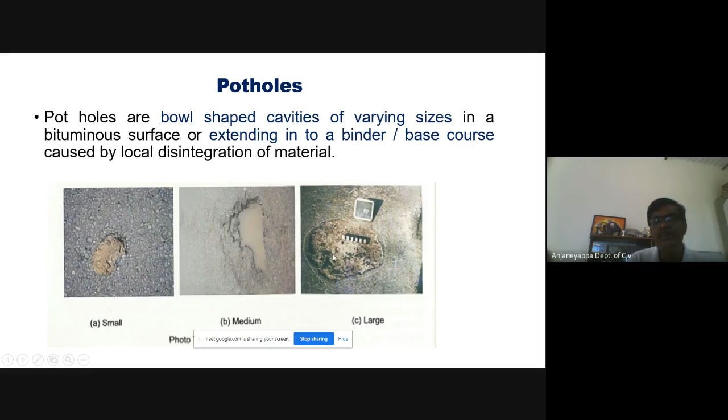What are the causes for these potholes? The most common cause for pothole formation is loss of adhesion in the bituminous surface course due to ingress of water into the pavement or due to higher voids in the surface. The bituminous pavement gets softened as a result of loss of cohesion under the action of traffic.

If not attended to in time, the aggregates in the surface get progressively loosened, which results in a pothole. Lack of proper bond between the bituminous surface and the underlying water bound macadam or wet mix macadam base layer can also cause formation of a pothole.

A thin bituminous surface which is unable to withstand heavy traffic, and improper or inadequate camber, can also cause potholes. In dense mixes like bituminous concrete, potholes can be caused by too much or too little fines, that is the material passing the 75 micron or sand size particles.

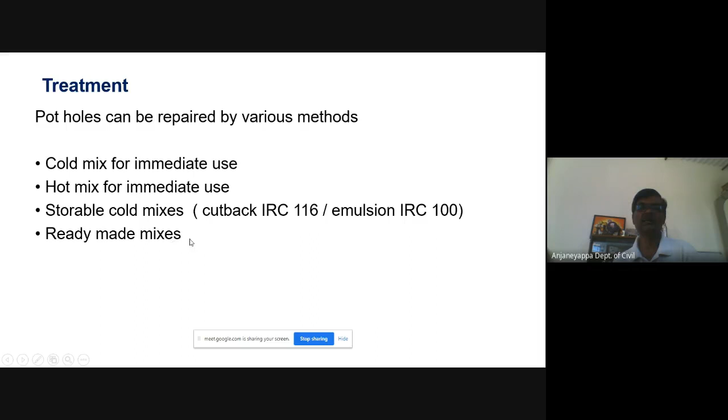We can also use ready-made mixes. Many companies prepare pothole patching mixes that come in bags. So we can bring those bags consisting of ready-made pothole patching mixes and use them. All these methods can be used for patching a pothole.

So here we can see a video of the pothole patching method operation. I have two videos, very old videos, but they are still relevant.

These videos are by the International Road Federation. You can see it was prepared in 1985 by the International Road Federation.

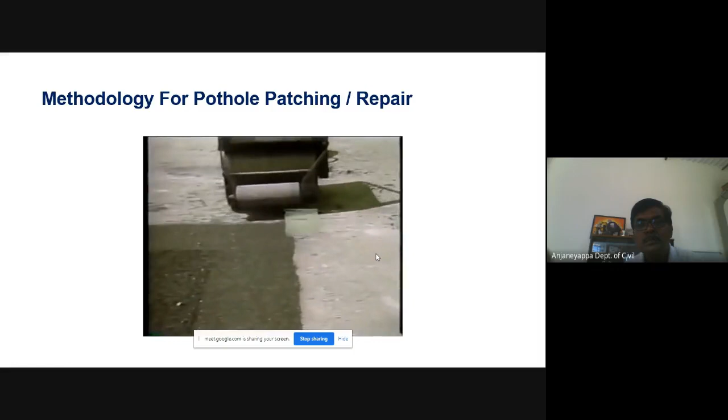Potholes are a major inconvenience, a safety hazard, and are damaging to vehicles. This program covers procedures for repair of potholes in asphalt concrete pavement. It focuses on the materials and equipment used in pothole repair and the procedures for making a permanent repair. Potholes must be repaired quickly because they are a hazard. They can cause serious accidents, and they slow down the flow of traffic.

It's important to follow the correct procedures for repairing potholes. You'll save money, and you'll ensure that the repair will last longer.

Potholes are caused when traffic breaks up a weak spot in the pavement. Several factors can contribute to weak spots, among them overweight vehicles, construction flaws, or water. Another major cause is repairs not done right the first time. A poor repair job like this won't last more than a few days.

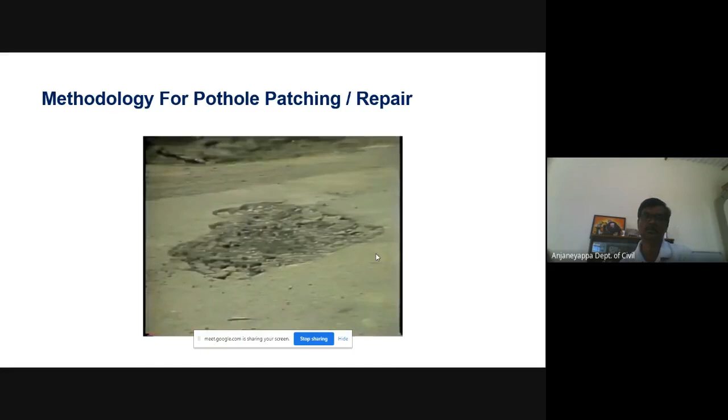On the job, you'll see many sizes and shapes of potholes. Some will be shallow, some deep, and some will be irregular. The repair procedures are basically the same, no matter what the size or shape.

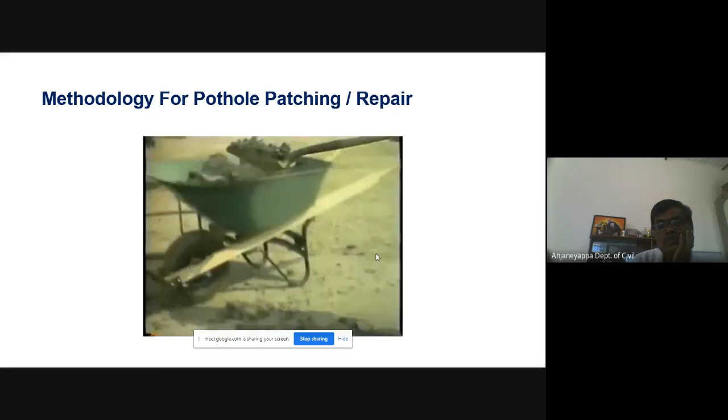Pothole repair involves 9 steps: placing traffic control devices, marking the defective area to be repaired, cutting out the defective material, cleaning out the hole, applying the tack material.

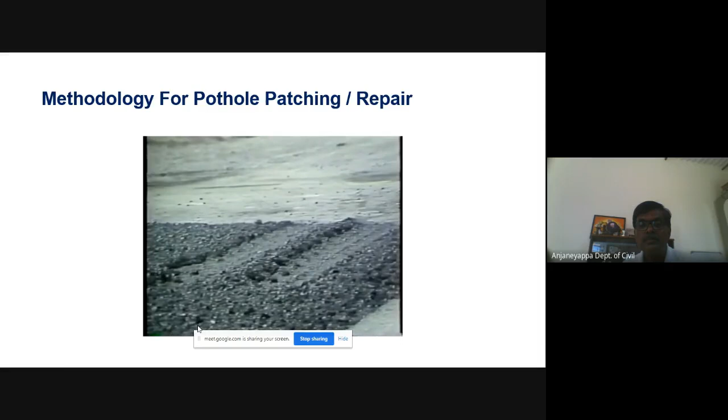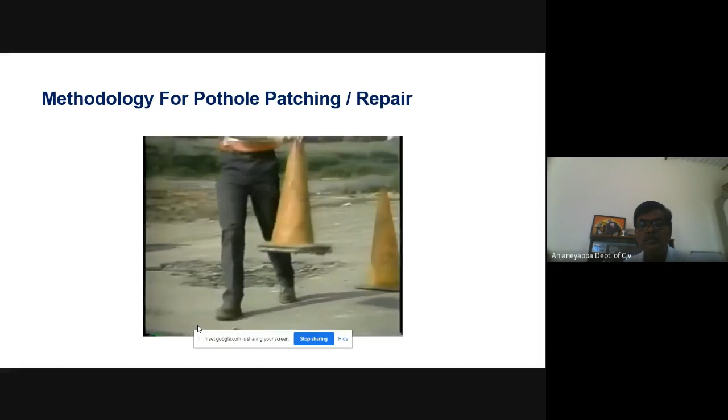Pothole repair involves 9 steps: placing traffic control devices, marking the defective area to be repaired, cutting out the defective material, cleaning out the hole, applying the tack material, placing the mix, compacting the mix, cleaning up the job site, and preparing to move to the next job site.

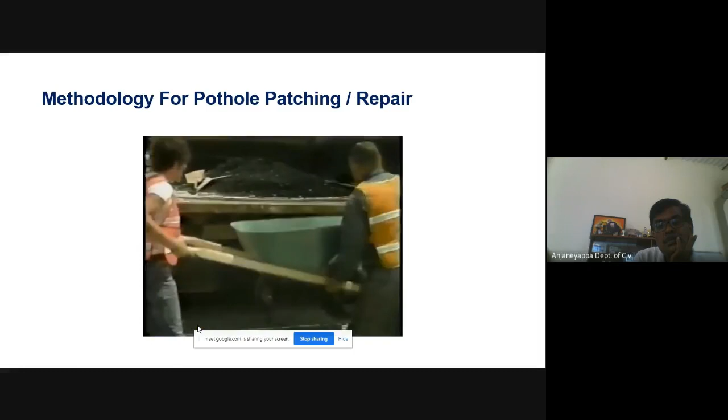Let's look at each work step in detail. The first step covers placing traffic control devices, who are responsible for the safety of the crew and motorists.

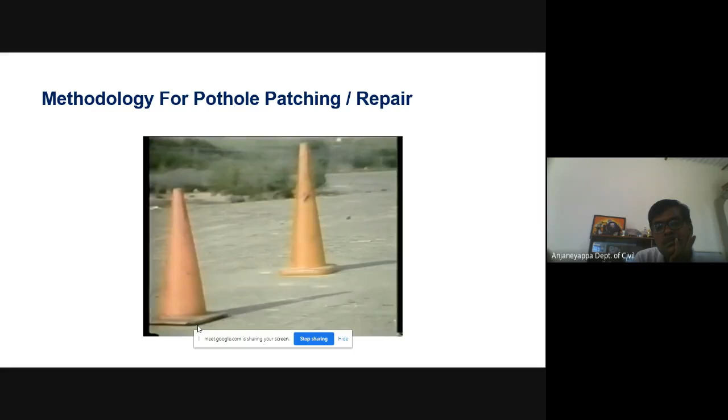Observe the work area and decide where to place control devices. Place signs, cones, and barricades so they can be seen by drivers in time for them to react. If required, position flagmen at appropriate sites. Follow your traffic control standards and procedures.

The second step is to mark the defective area. First, sweep away loose material from the pothole. Examine the area carefully to see the extent of the weakened pavement.

Then mark the area to be removed. Use chalk, crayon, or paint to mark the edges. Generally, you can use the width of an outstretched hand as a guide to be sure that you mark the area in good pavement. Anything more may result in the unnecessary removal of good pavement.

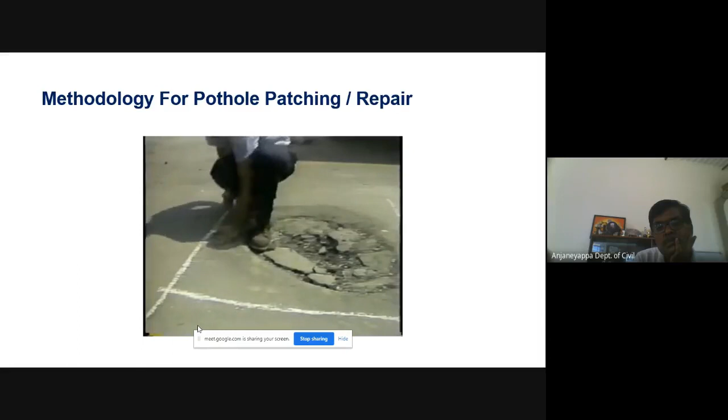Mark the repair area in a rectangular shape with straight sides and square corners. This is a step you should perform so your workers have clear instructions. Remember, you may have to enlarge the area once the cutting begins and you get a better look at subsurface conditions. Repair areas don't necessarily have to be square, but never use a round shape. Adapt the outline to the shape of the pothole.

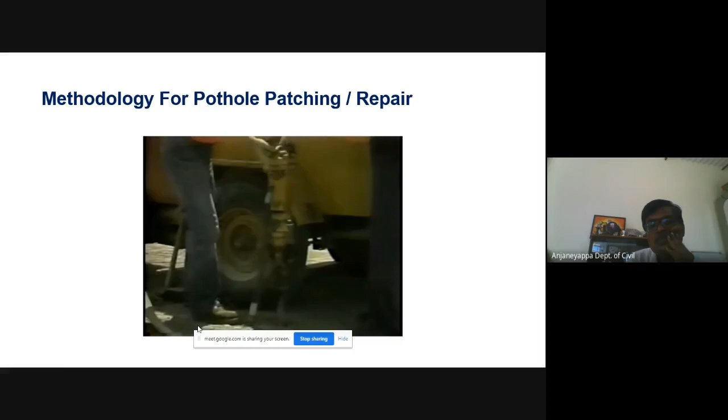The third step involves cutting out the defective material. To do the cutting, you'll be using either a jackhammer with a spade bit or a pickaxe. The cutting action should always begin in the center and proceed toward the edges. This has 2 advantages: there is less resistance to cutting, and you'll not weaken the good pavement outside of the marked edge. Also avoid rocking the spade bit, because this will damage the good pavement.

Vertical sides are essential for proper compaction of the patch. Always check the sides with something square to make sure that they are vertical. This, along with compaction, is one of the 2 most important steps for a permanent repair. Be sure to cut down to stable material. It will form a good foundation for the patch. Also make sure that the bottom is level.

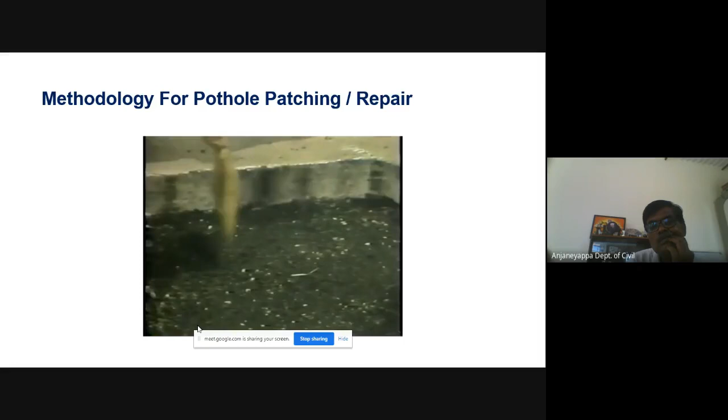The fourth step is the removal of defective material. A patch adheres best to a clean surface. Using shovels, remove all loose materials and debris from the hole. Next, blow out the fine materials using an air compressor, or sweep it out using a stiff bristled broom.

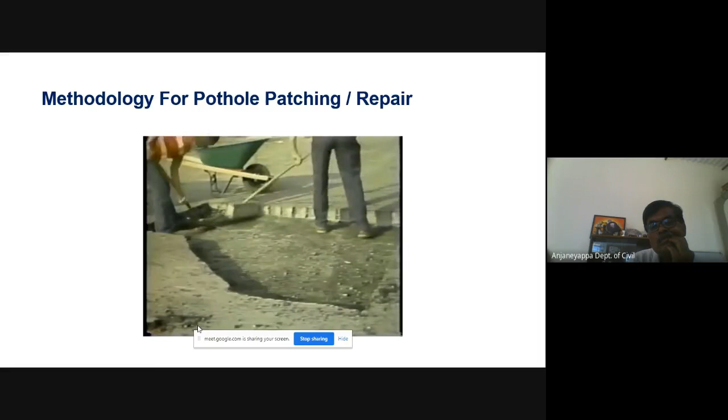Dispose of debris properly. Do not leave materials in the roadway, on the shoulder, or in a drainage ditch. Material left in the ditch will cause the water to pond and may result in another pothole. Next, make a thorough inspection to see that no weakened material remains on the sides or bottom of the hole or in the corners. Once all loose material is removed, you're ready for tacking.

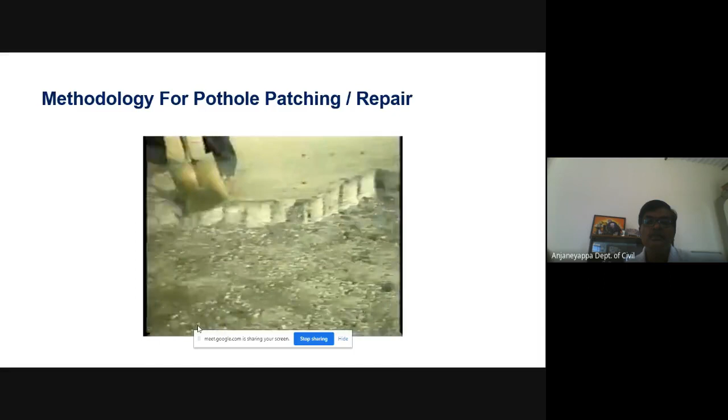Tacking the hole is step 5. Tack serves as a kind of glue to bond the patch in place. Apply tack to the sides of the hole first. Do not overlap onto the surrounding pavement. Use either a hand broom or a sprayer.

Remember, apply a thin film on the sides and the bottom of the hole, allowing the texture to show through. Pouring results in excess tack, which will soften the patch and cause it to break up.

The materials you'll use for tacking are either emulsions or cutbacks. Emulsion is preferred. It requires only a little curing before putting premix in the pothole. Also, you can apply it to damp surfaces. Cutback is less desirable as a tack since it must cure at least 15 minutes. Also, cutbacks may require additional heating for ease of handling. You can recognize cutback by its gasoline or kerosene smell.

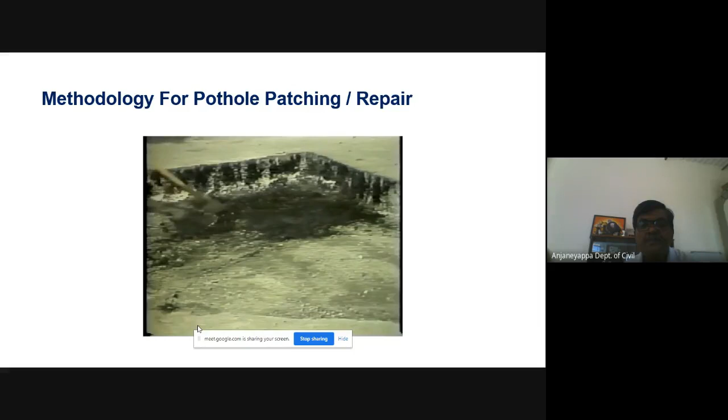In some cases, you'll have to cut out the damaged material down to the granular base. In this situation, apply a heavier coat of tack to the bottom of the hole. This is called priming. It acts as waterproofing. Properly cured tack is sticky to the touch. Remember, if you apply too much tack, the patching material will be weakened. But if you apply too little tack, the patch will not stick properly.

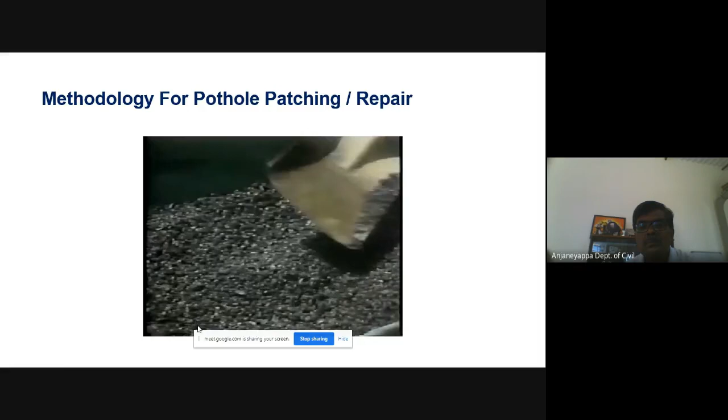Step 6 involves placing the premix material. Whether you're using hot mix or cold mix, make sure it's workable. Don't use it if it's hard to shovel or it's crusted. Begin placing the premix using a square pointed shovel. Begin in the corners and sides first. Then place material in the center.

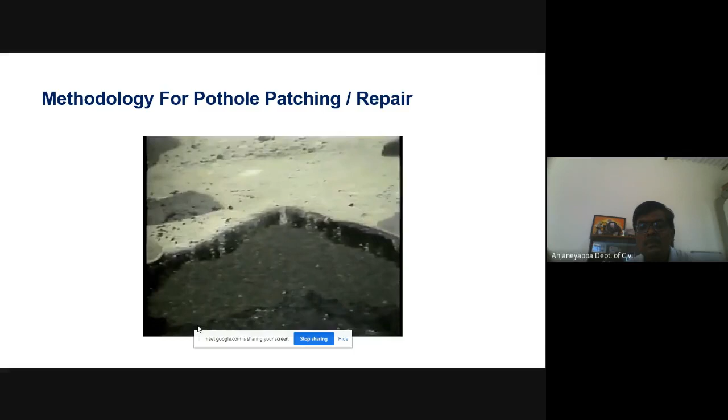If the hole is deep, it may require several layers of material. Generally, the maximum depth to use for each layer is 8 centimeters in uncompacted layers. This is equivalent to the width of a hand. After placing each layer, spread it level with a rake. Make sure you keep all patch material in the hole. Mix left on the pavement around the hole will make the next step harder.

Place additional layers only after compacting previous layers. Leave the uncompacted surface layer of the patch slightly higher than the surrounding pavement surface to allow for compaction.

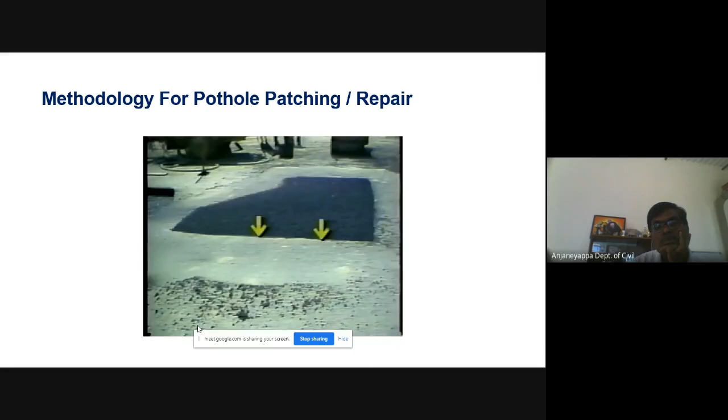Step 7 involves compacting the premix. Compaction, along with making the sides of the hole vertical, is one of the 2 most important steps. Good compaction makes the patch last a long time.

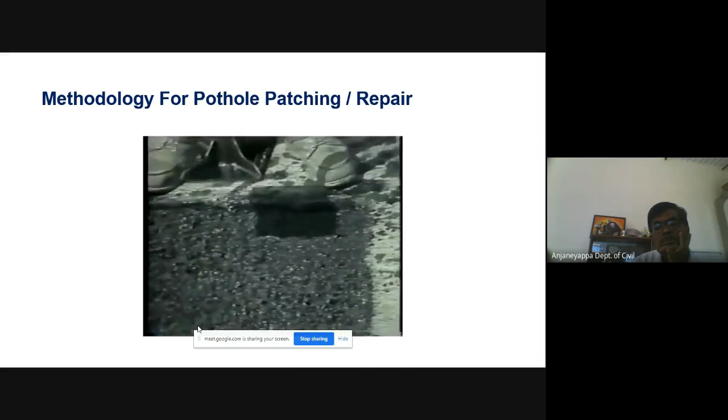To compact the patch, you can use several different types of equipment. The best type is the vibratory roller. It works better and faster. You can also use a vibratory plate, a tandem steel-wheeled roller, or a hand tamp. A hand tamp is not the best tool to use. If it's the only compaction tool available, tamp especially thoroughly and use thinner layers, about half the width of a hand.

If you use a roller, make sure the area around the patch is clear of debris prior to compaction. Debris under the roller will cause poor compaction.

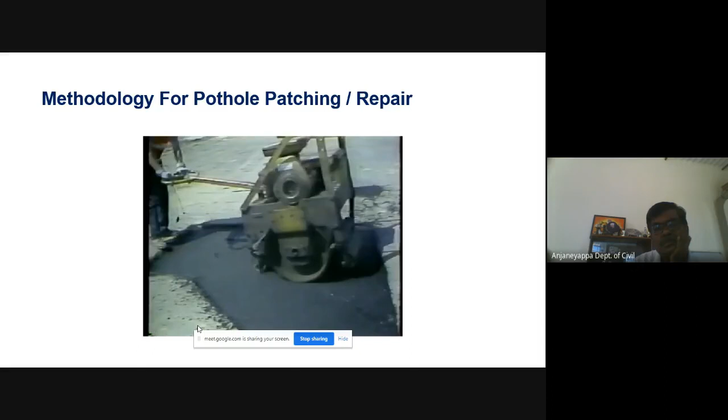Remember, if the hole is deep, it may require several layers. Compact each layer thoroughly prior to placing another layer. Whether you're placing 1 or 2 layers, the procedures are the same. Always start compacting in the corners and edges. Then work in toward the center of the patch.

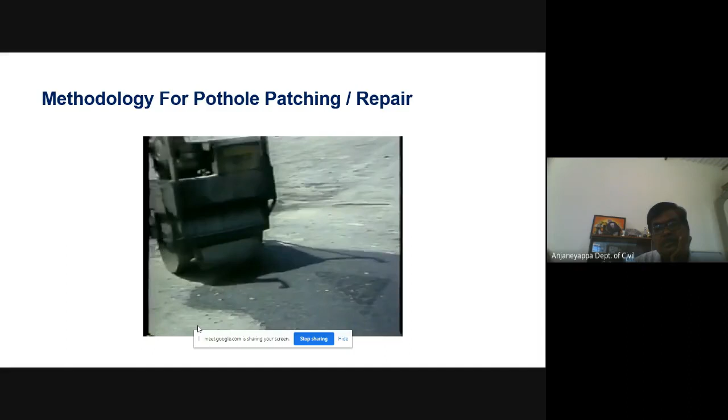First, make 1 or 2 passes without vibration. Otherwise, the machine will push uncompacted premix out of the patch. Then make a minimum of 10 to 15 passes with vibration. You can tell when the patch is thoroughly compacted because repeated applications of the compactor won't leave any impressions in the patch surface. Leave the final surface of the patch slightly rounded above the surrounding pavement.

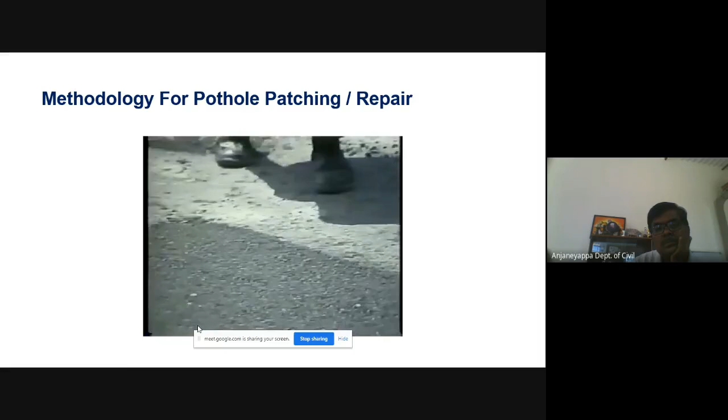Check the crowning with a straight edge in the direction of traffic and across the roadway. The center of the patch should be about the thickness of a pencil above the pavement. This helps drain any water away from the patch.

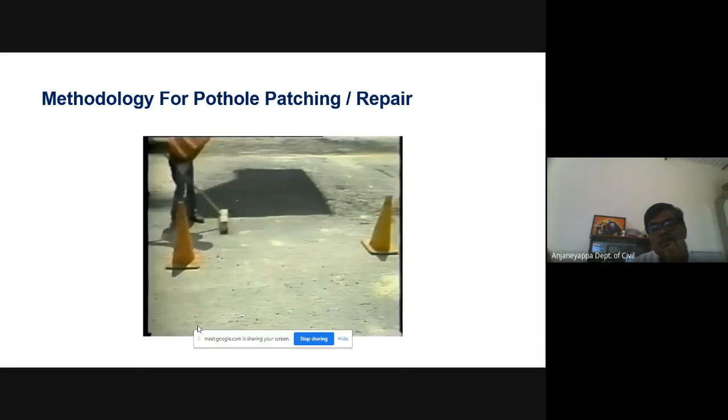Next is step 8. You should make sure the crew cleans up the job site. Dispose of excess material properly. Once again, don't throw debris onto the shoulder, in ditches, or near catch basins. It will cause drainage problems. Load it onto the truck or dump it in a designated area.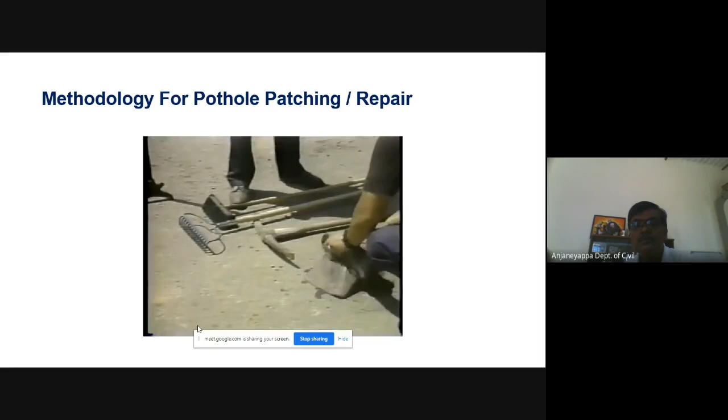There's still one last step before the repair is complete. Step 9, preparing for the move to the next job site. First, count all the hand tools and equipment, and make sure the tools and equipment are properly cleaned and nothing is broken.

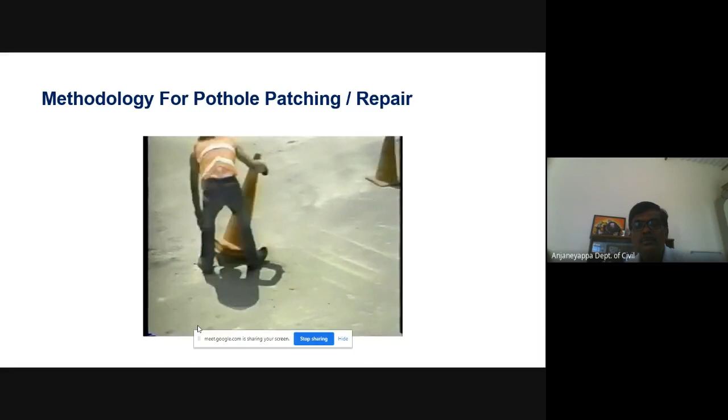As the equipment is being loaded, make a final inspection of the job site. Make sure that nothing is being left behind, and the work site is left in proper condition. Also, remove and load traffic control devices in the reverse order in which they were originally placed. Follow your standards for traffic control to make sure it is done correctly.

As the crew loads the devices, make a final security check to see that all equipment is secured before moving on to the next job site.

Before we finish, let's quickly review each of the 9 steps of pothole repair. The 9 steps include placing traffic control devices,

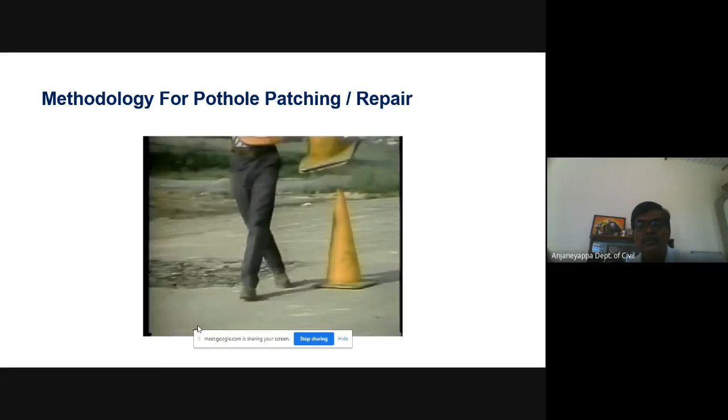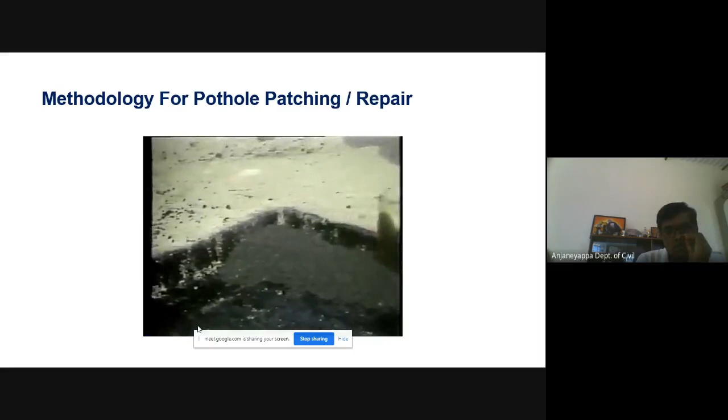marking the defective area to be repaired, cutting out the defective material, cleaning out the hole, applying the tack material, placing the mix, compacting the mix, cleaning up the job site, and preparing to move to the next job site.

Following the procedures presented in this program will result in professional, long-lasting repairs, which will benefit you, your crew, and the driving public.

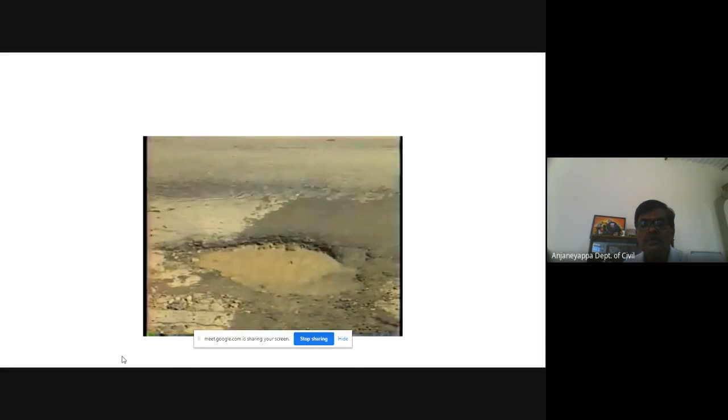Potholes are caused by weak spots in roads. These weak spots can be created by heavy vehicles, poor construction, or water.

This videotape will show you how to repair potholes in surface treatment pavement using granular material. If you're using asphalt mix, refer to the IRF videotape, Pothole Repair in Asphalt Concrete Pavement.

Regardless of their location, all potholes can be a threat to your safety and damage your vehicle. But most importantly, potholes can result in severe and costly road damage if they're not repaired quickly and correctly.

Surface treatment pavement is not as strong as asphalt concrete pavement. Therefore, these potholes must be repaired before they become so large that the road base is weakened. Extensive repairs would then be necessary.

A repair using the correct procedures will keep water from getting into the road base, resulting in a long-lasting patch.

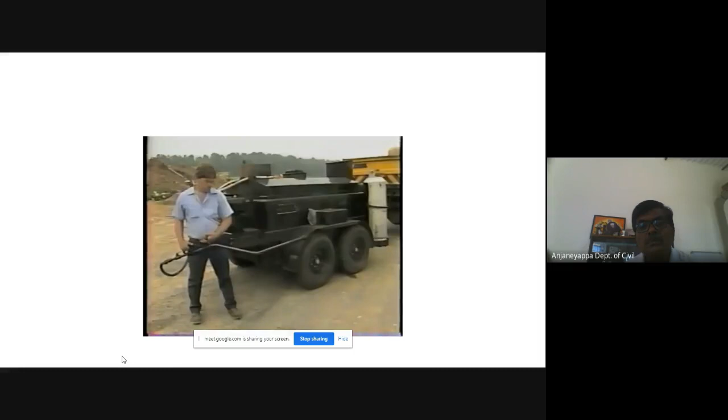Proper equipment will help you make the repair efficiently. You will need hand tools for removing damaged material from the pothole, placing the new material, and cleaning up the work site. An asphalt sprayer for applying the liquid asphalt, and a vibratory roller to make the materials firm.

You can also use a vibratory plate compactor or a tandem steel-wheeled roller. You will need a dump truck to carry your crew, equipment, and materials to the work site, and traffic control devices to keep vehicles moving safely.

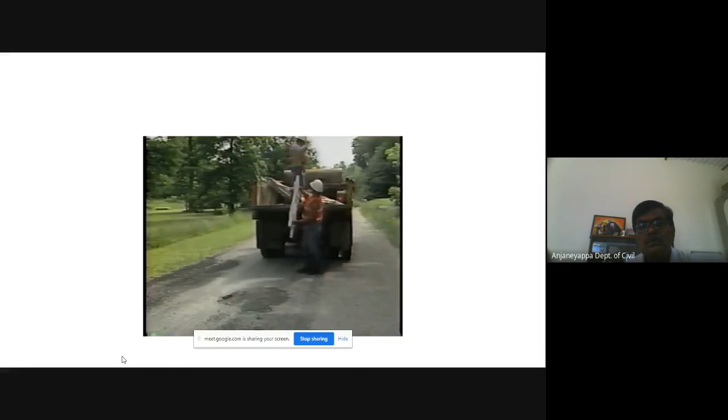The proper materials make the repair durable and long-lasting. You will need granular material to fill the hole. It must be graded and approved according to local specifications. This material should be the same type and quality as the existing base.

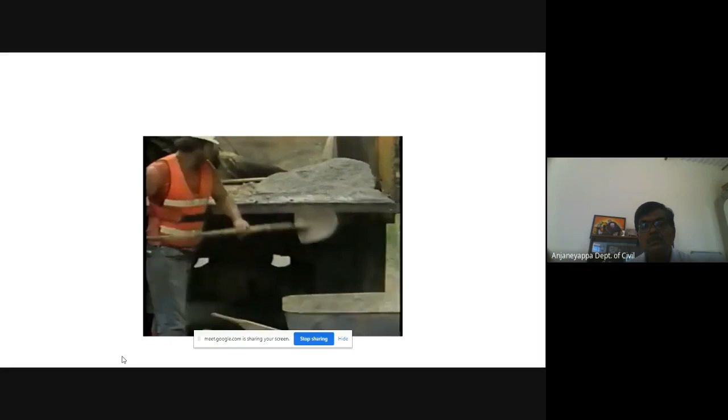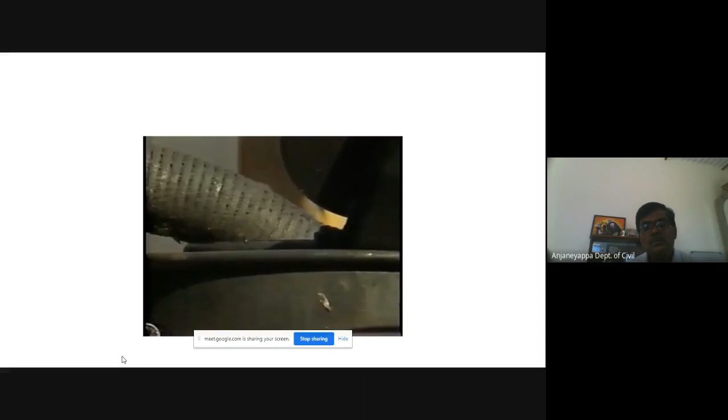You will also need cover aggregate that is clean, dry, and no bigger than your thumbnail. Liquid asphalt to seal the patch. The liquid asphalt may be rapid or medium curing asphalt cutback or asphalt emulsion. And water to make sure the granular material has the correct moisture.

All potholes in surface treatment roads are repaired in the same way. You will use the same procedure for all shapes and sizes of potholes. There are 8 steps. Step 1. Place the traffic control devices. Step 2. Mark the damaged area.

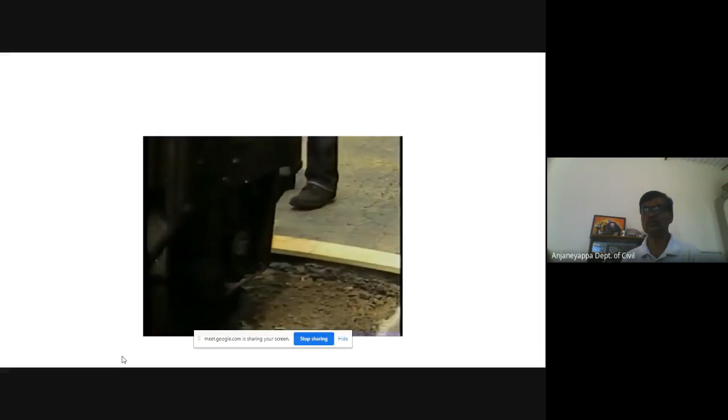Step 3. Cut out and remove all damaged material. Step 4. Fill the hole with granular material. Step 5. Compact the granular material. Step 6. Seal the surface with liquid asphalt and cover aggregate.

Step 7. Clean the work site. Step 8. Remove the traffic control devices. We will look at each step in detail.

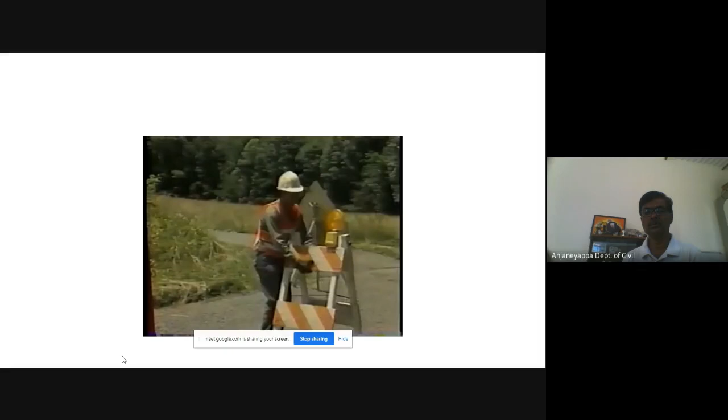Step 1. Place traffic control devices. These include barricades, cones, and signs. Proper placement of these devices is important to the safety of your crew and the vehicles. Place these devices so that the vehicle drivers have adequate time to respond. For further instruction, refer to the IRN videotape, Traffic Control During Maintenance.

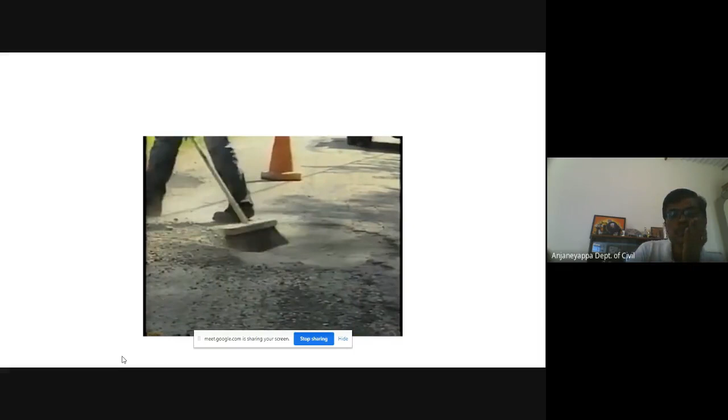Step 2. Mark the damaged area to be repaired. Before you mark this area, clean out the pothole so you can inspect it. Clearly mark the pavement outside the pothole.

To avoid waste, the line should be no further from the hole than the width of your hand. The line should also be straight and located in good pavement. The corners should be as square as the shape of the hole will allow.

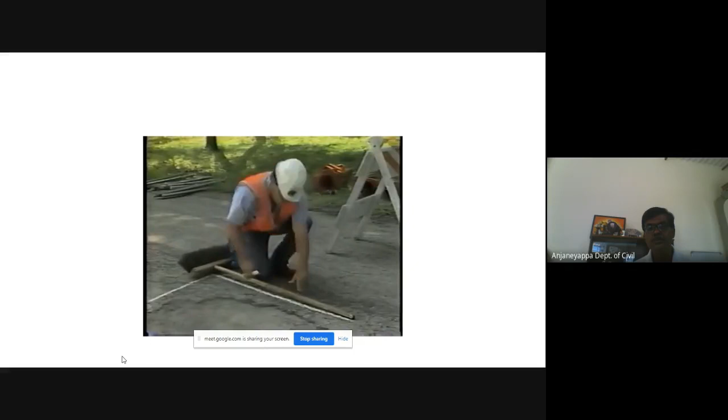Step 3. Cut out and remove the damaged material. Use a pickaxe and shovel. Start in the center and work toward the sides. Remove all material necessary to reach a firm, flat bottom.

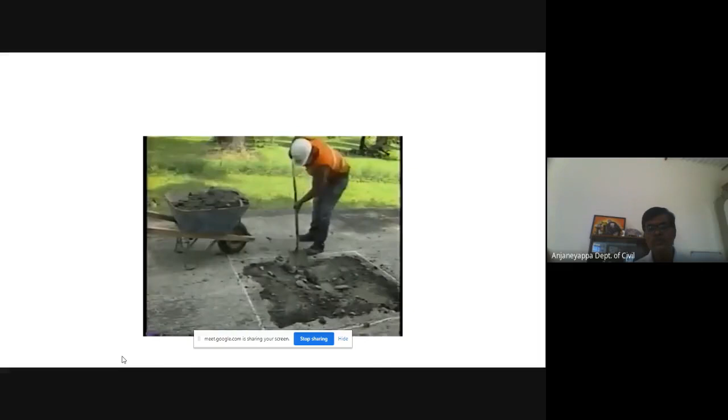Remove damaged material with a shovel. Do not forget to dispose of this material away from the pavement and nearby ditches. Proper disposal will help keep the pavement clear for vehicles.

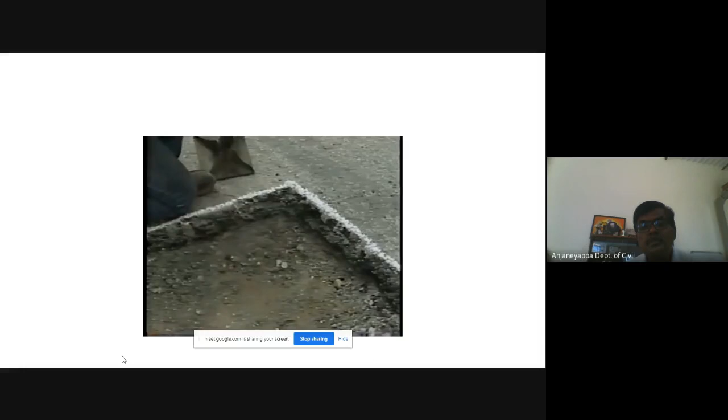The sides should be straight and vertical to the flat bottom. Check this in several places. The straight sides and a flat bottom will make the finished repair last a longer time. Also, be sure the sides and bottom are firm.

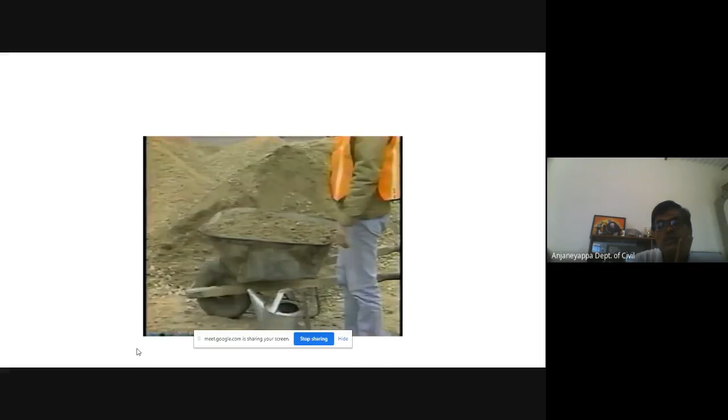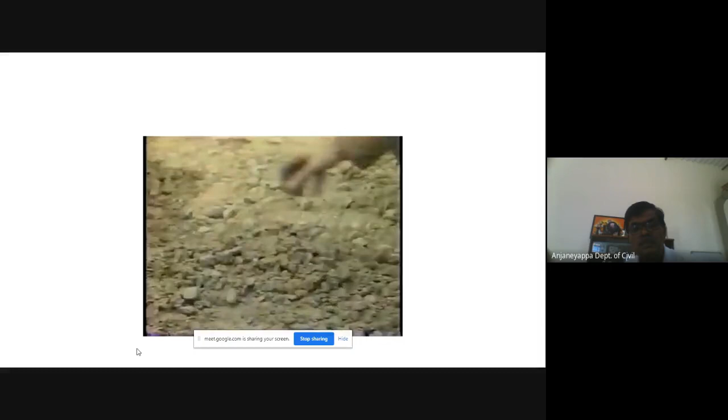Step 4. Fill the hole with granular material. Before placing the granular material in the pothole, check for proper moisture. Squeeze a sample in your hand. If it is too dry, the granular material will crumble. Water must then be added to correct the dryness. A sample has correct moisture if it forms a tight, compact ball when you squeeze it. If the sample is too wet, it will flow very slowly between your fingers when you squeeze it. In this case, the granular material should be spread out to dry.

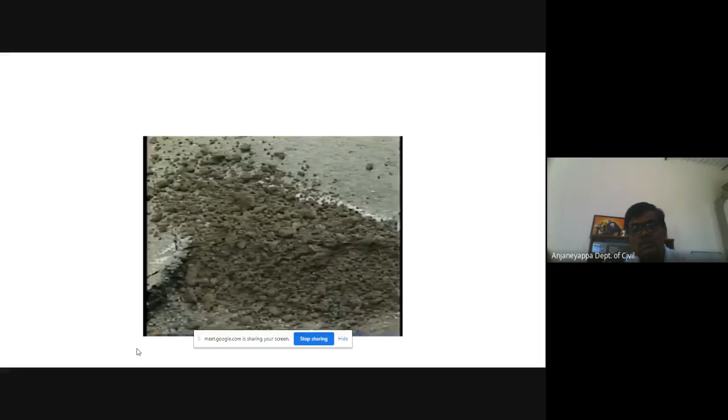Next, check the depth of the hole. If the hole is less than 15 centimeters deep, or shorter than the length of your hand, the granular material can be placed in a single layer. If the hole is deeper than 15 centimeters or longer than the length of your hand, the granular material must be placed in 2 or more equal layers. Each layer should be no thicker than 15 centimeters.

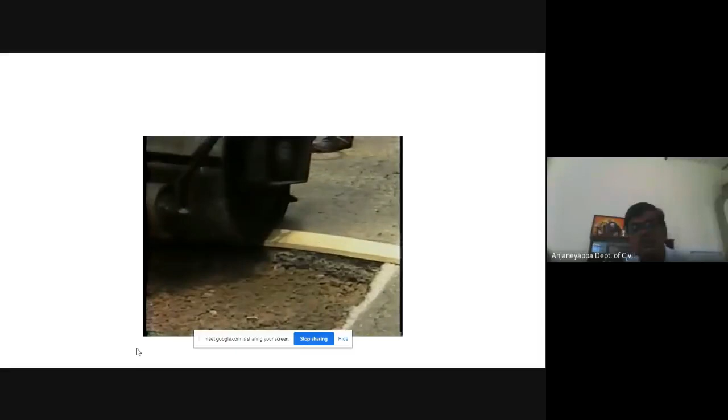Step 5. Compact the granular material. Place wooden planks on the edges of the hole to protect the sides. If using a vibratory roller, make 2 passes without vibration, then make 10 to 12 passes with vibration. Start from the corners and work toward the center. Compact each layer thoroughly. If using a hand tamper, make the layers half as thick. Compact the granular material until it is as firm as possible.

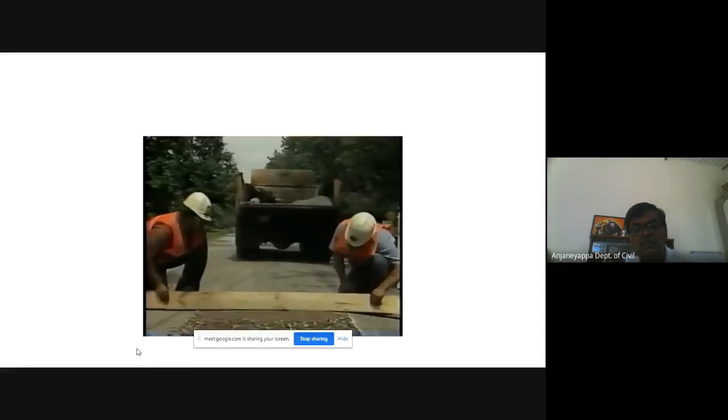After compacting the last layer of granular material, make sure the repair is rounded slightly above the surrounding pavement. This will help keep water from entering the road base and damaging the pavement structure.

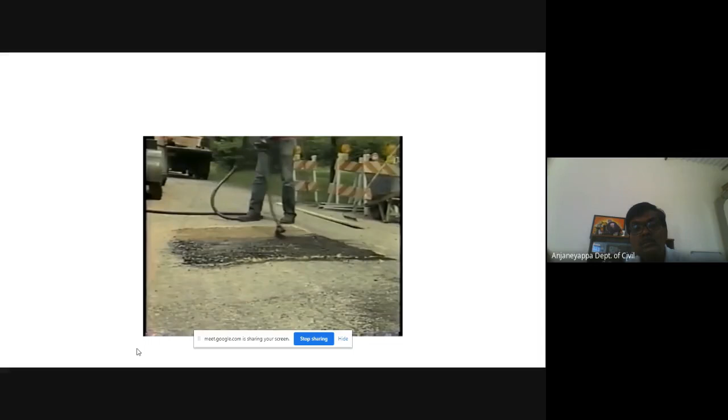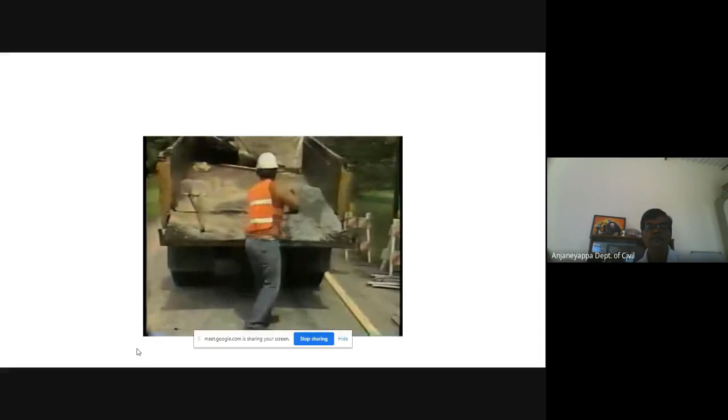Step 6. Seal the surface with liquid asphalt and cover aggregate. To begin this process, apply the liquid asphalt using an asphalt sprayer or an asphalt pouring pot if you do not have an asphalt sprayer. The surface must be clean and dry. Make the application thick enough to soak into the patch and form a light coating over it. Overlap the asphalt onto the existing pavement 8 centimeters, or the width of your hand. Immediately after applying the asphalt, spread a single layer of cover aggregate across the surface of the patch.

Now, compact the aggregate so it locks together properly. Continue compaction until the aggregate has been well embedded in the asphalt and a uniform surface obtained. Make sure the surface of the patch is smooth and rounded slightly above the surrounding pavement, about the thickness of a pencil.

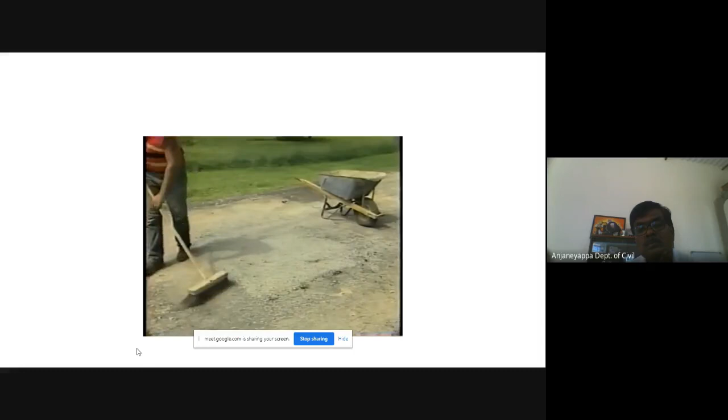Step 7. Clean the work site. Sweep and dispose of any debris away from the drainage ditches, the shoulder, and the pavement. The road will be safer.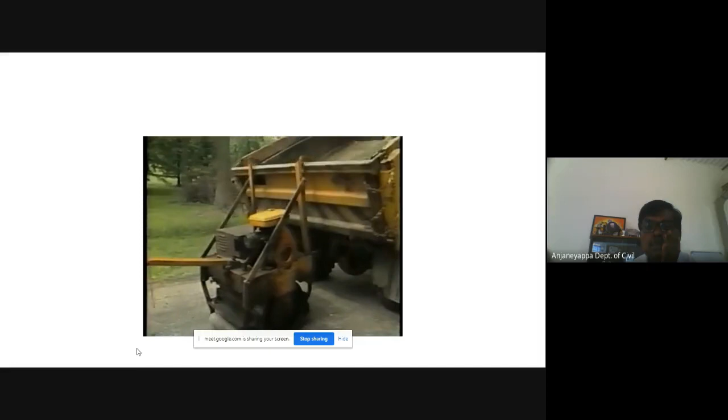Before you leave the work site, load any unused material, equipment, and hand tools into the truck. At the end of the day, clean your hand tools before you load them.

Step 8. Pick up the traffic control devices and load them on the truck. Do this in the reverse order of their original placement. The maintenance crew is now ready to proceed to the next work site.

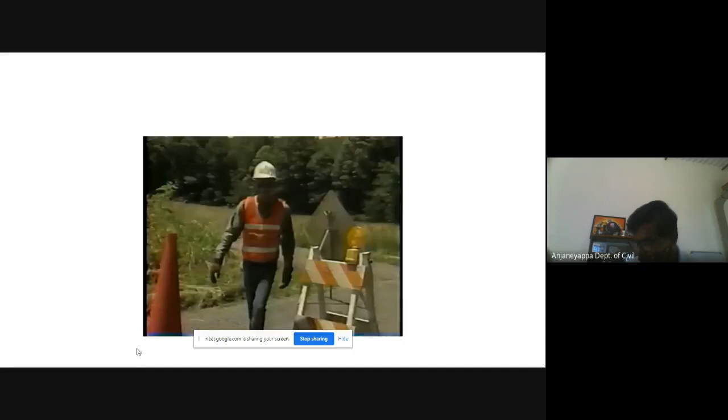But before they go, remember there are 8 steps necessary to repair potholes in surface treatment pavement. Step 1. Place the traffic control devices. Be sure the signs, cones, and barricades are placed correctly.

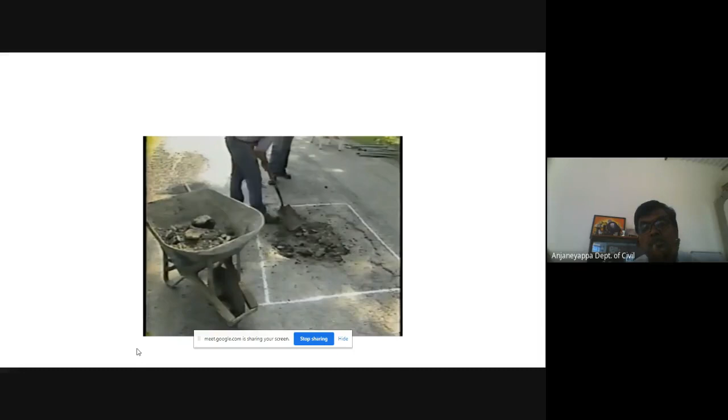Step 2. Mark the damaged area. Make the lines straight and the corners square. Step 3. Cut out and remove all damaged material. Keep the sides straight and vertical to a flat bottom.

Step 4. Fill the hole with granular material. Place the material in even layers. Step 5. Compact the granular material. Make each layer as firm as possible.

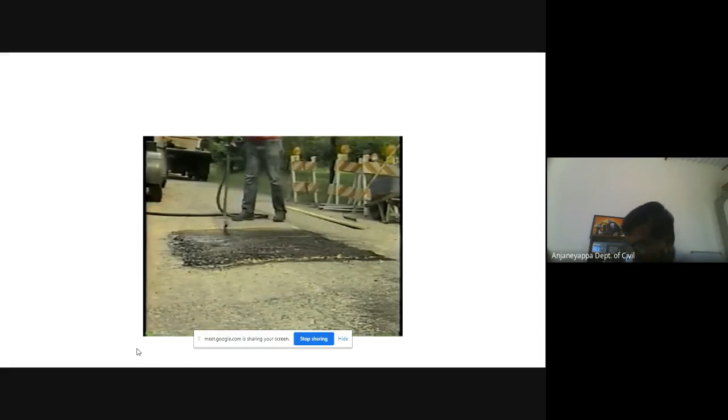Step 6. Seal the surface with liquid asphalt and cover aggregate. The asphalt application should be even and slightly overlap the surrounding pavement. The cover aggregate should be compacted thoroughly.

Step 7. Clean the work site. Dispose of all debris away from the road and nearby ditches. Step 8. Remove the traffic control devices. Pick them up in the reverse order of their placement.

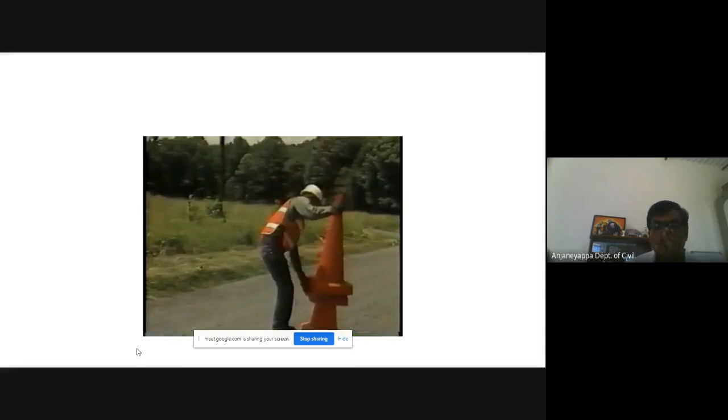The procedure you have just seen will provide a long-lasting repair, which will preserve the road structure and make travel safer for everyone.

I believe these two videos will give you a better insight into the patching of potholes. Right now, let us look at the steps one by one.

For pothole patching, step number one is placing the traffic control devices. Place traffic cones, flags, and better a flagman to guide and control the traffic movement during patching.

Step number two is marking the defective area or the pothole area. Sweep away all loose materials of the pothole. Mark the area using chalk in a rectangular or square shape. However, marking need not be rectangle or square shape. Ensure straight sides and square corners while marking.

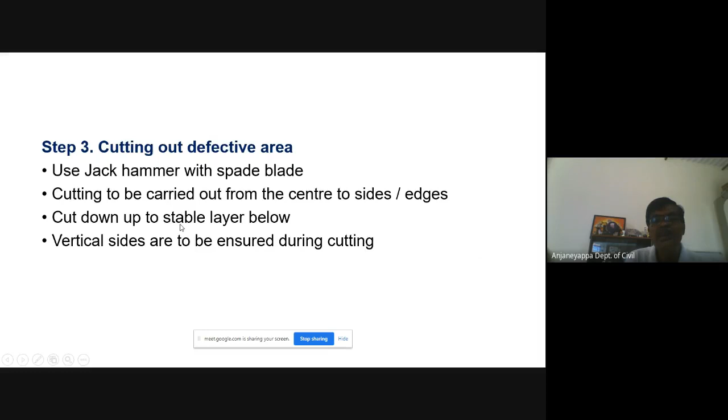Step number three, cutting out the defective area. Use a jackhammer with a spade blade. Cutting to be carried out from center to sides or edges. Cut down up to a stable layer below. Ensure the vertical sides during the cutting.

Step number four, removal of loose materials. Remove all loose materials from the pothole area. Blow out fine material from the potholes using compressed air. Do not leave any loose material in the pothole or on the pavement surface.

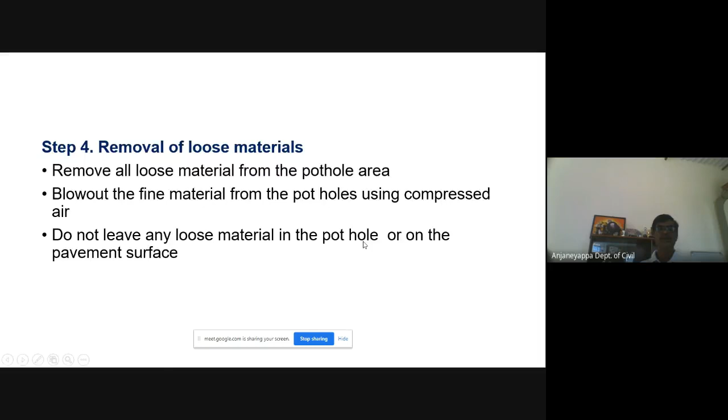Step number five, apply the prime coat and tack coat if required. Apply prime coat if the bottom layer of the pothole is a granular layer like wet mix macadam. Apply the prime coat using slow setting emulsion, SS1 grade, with quantity sprayed at 0.7 to 1 kg per square meter. For spraying this emulsion, use mechanical sprayers. Please do not pour the emulsion into the pothole; ensure uniform spray on sides and bottom surface of the pothole.

Do not put any extra water to the emulsion in the name of workability. Apply tack coat if the bottom surface is wet mix macadam already coated with prime coat, or just tack coat if the bottom surface is bituminous. Remember, prime coat is required only on a granular layer. Tack coat is done on an existing bituminous layer, or a bottom bituminous layer, or a granular layer which is already primed. Apply tack coat using rapid setting emulsion. So for prime coat it is slow setting emulsion, and for tack coat it is rapid setting emulsion, specifically RS1 grade.

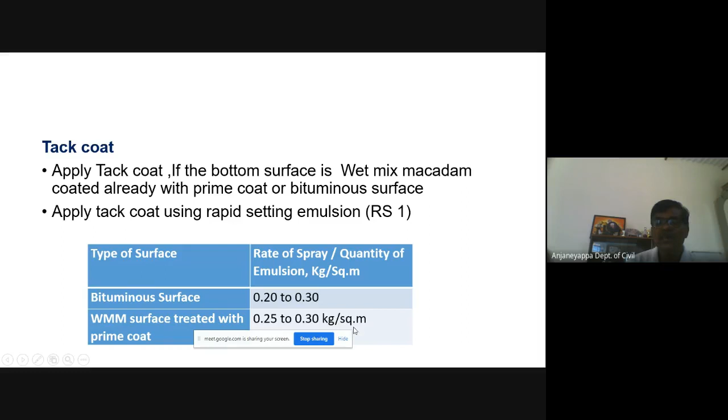Step number six, placing of bituminous mix in the pothole. Use a square pointed shovel for placing the mix. Put mix in the corners and sides first, then proceed to the center portion. If the pothole is deep, put mix in layers not exceeding a maximum of 75 mm thick. Place additional layers after compacting the bottom layer or the first layer.

Step number seven, compaction. The size of the roller should be smaller than the pothole size. Use a vibratory tandem roller only if the pothole size accommodates the roller drum width. Otherwise, use walk-behind rollers or plate vibrators. Compaction should start from the corners and edges, then proceed to the central portion. The first two passes of the compactor are always static passes, without vibration, and the remaining passes are done in vibratory mode.

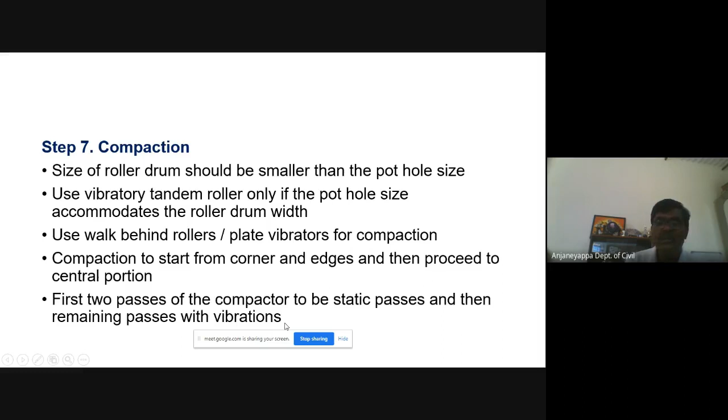Check the surface profile using a straight edge. Ensure a uniform even surface after compaction. Minimum temperature during compaction of the hot mix should not be less than 90 degrees if you are using hot mix. This is not applicable if you are using cold mix. Many times we use hot mix, so in those cases, the temperature of the mix should not go below 90 degrees; this is the least temperature that we need to maintain.

Step number eight, cleaning of the pothole patch site. Clean the patch site properly. Dispose the material at designated places, not near ditches, not near drains, not in the roadway portion. Ensure no loose materials remain near the pothole patch site or on the pavement.

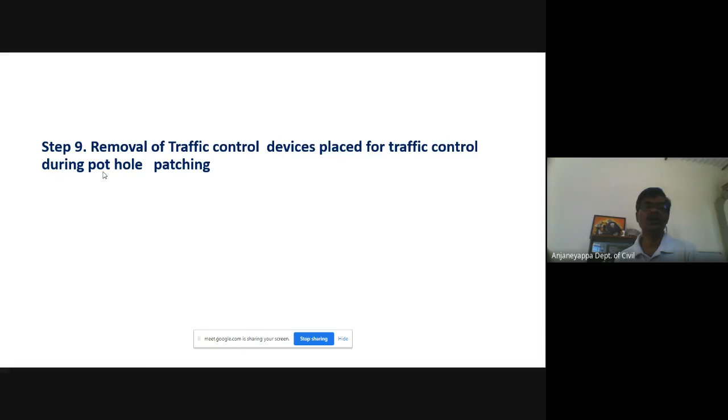Step number nine, removal of traffic control devices placed for traffic control during pothole patching. So this is about the patching of pothole.

Any clarifications? No, sir.